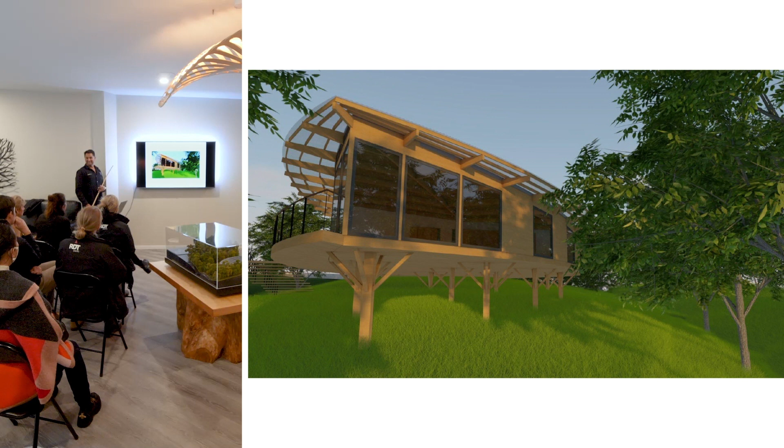Now, this is what it was meant to look like. It's pretty close. We've lost a few things along the way, but by and large, it's about there. The thing that this has is that the foundation piles are trying to mimic trees. So the roots come out from the ground, and then the building sprouts up. That was the idea. There's clear roof for light, photosynthesis, so the kids get enough sunlight and perform well.

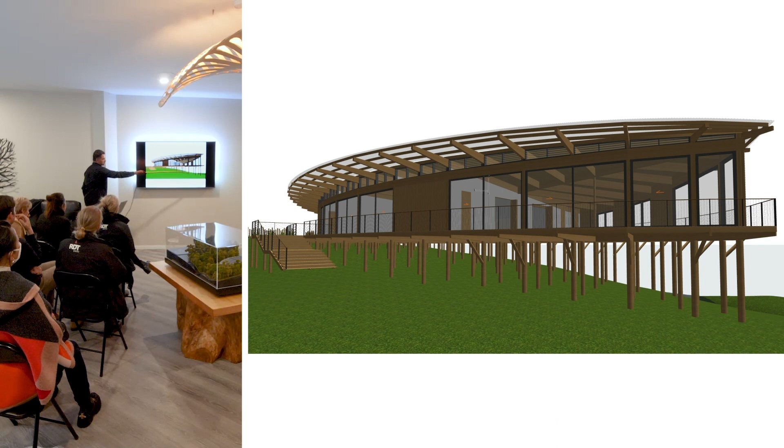So yeah, these are early concepts. You'll see the back of the building is quite tall piles. So at head height, you'll be within the treetops there. So a very interesting project, and it's meant to resemble a leaf. All of you have seen a leaf before. So as you walk through, you'll see what the design philosophy was, and that's almost like a leaf.

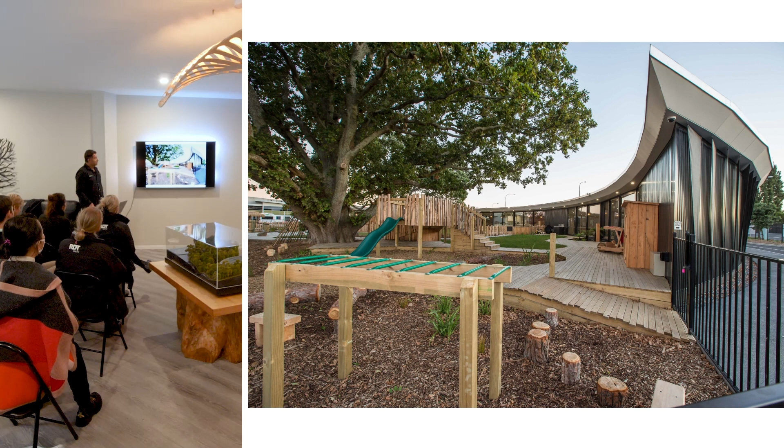Well, we're no stranger to building weird curved buildings, so this is one we did a few years ago, which is shaped like a crescent, quarter moon, wrapping around two trees, which the client also owns. Quite nice, sharp, pointy bits, which you can see there. And obviously we do a range of projects, small and large.

Now, some issues. As every project has issues, we all know. The issues in this one weren't too dissimilar to other projects, but some things were worse than others. The standard stuff: services, asbestos, ground conditions, procurement, transportation of materials, etc.

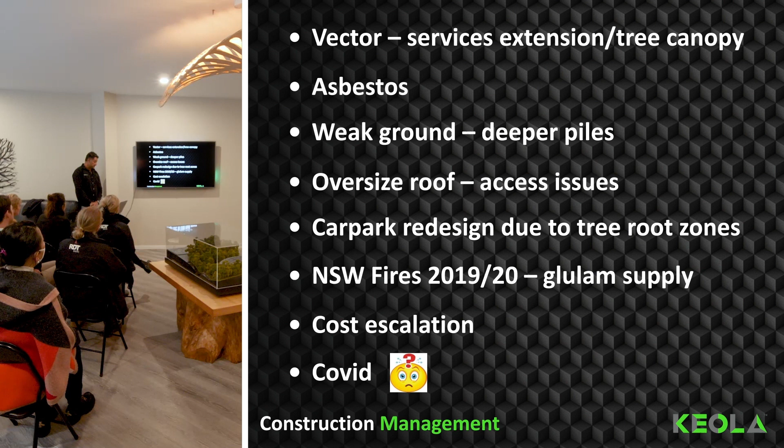Do you want to hit the light, mate? And a bit of redesign. Is that okay for everyone? Yeah. Maybe I can use my pointer now. Would be smart. No. Old school is better. Okay.

So I'll walk through a couple of the design elements. One of the key things was, as I showed you before, that it's meant to resemble trees and leaves. So we had external beams coming through the roof, which were meant to be the little veins of the tree, and obviously it needed to be in timber.

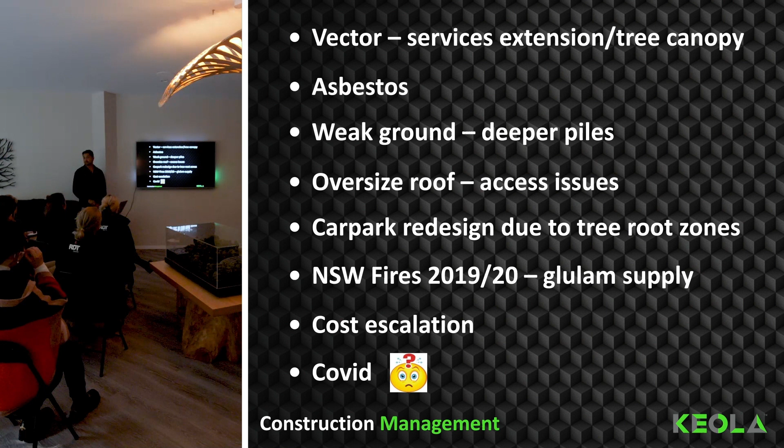But there were some fires just prior to us starting the project. So procurement-wise, these were all imported beams, which would have really thrown the project out, and there was a lot of uncertainty about timing and costs. And the standard cost escalation, which happens in pretty much 99% of jobs. And COVID, well, everyone's been blaming COVID for everything in the last 2 years. Everything's COVID. So we were a little bit the same.

How do you read that? Well, you read that as dollars, dollars, dollars. That's all it is at the end of the day, isn't it? And why is that a problem? Everyone's got money. What's the problem?

Well, the problem is that through COVID, most businesses experienced a huge business downturn. This school, obviously, kids were staying home, enrollments were low, etc. That affects your revenue. Holding costs, debt servicing, general uncertainty, people don't know what's going to happen. So we were asked to basically find some ways of saving money, which is easier said than done.

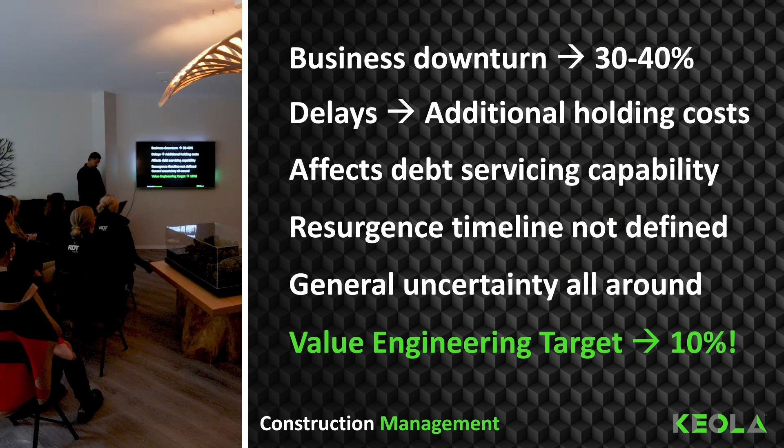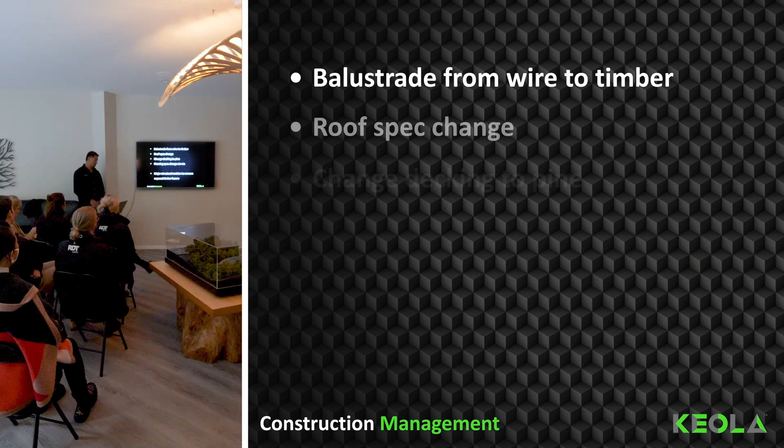So we came up with some solutions, lots of solutions, but obviously within reason. You still need a roof, you still need windows, so you can't go chopping everything out. So we had some general basic spec changes, changing balustrades, flooring specs, etc. But those weren't really adding up, so to speak, to what our target was.

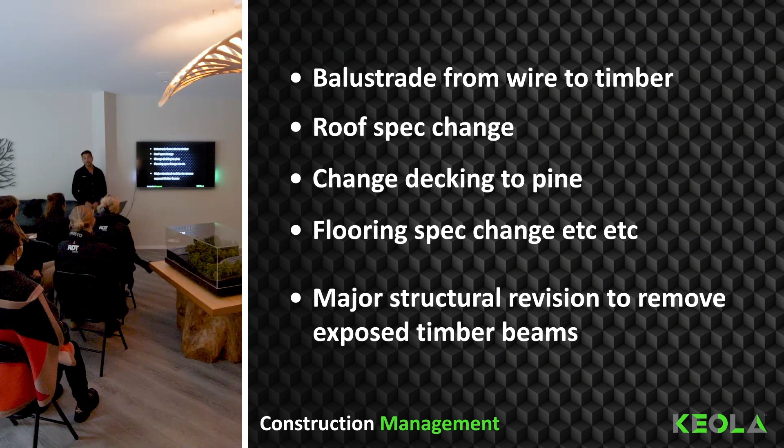Our target was 10%. The major thing was a structural revision to try and remove the exposed timber beams. It was expensive, it was coming from overseas, timelines weren't known, and without a roof, you can't progress much else on the building. So we decided to do something with that.

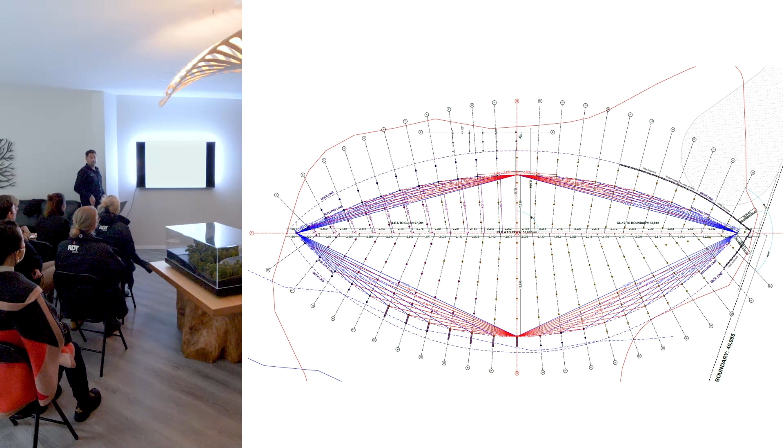So quick design summary. As you can see, it's a bit of a complex structure, quite a complex geometry with various lines and projections. All of these, you can see they flare out. They're not all parallel, which makes our life a bit interesting. Reminds you of the leaf. And the central core of the shape.

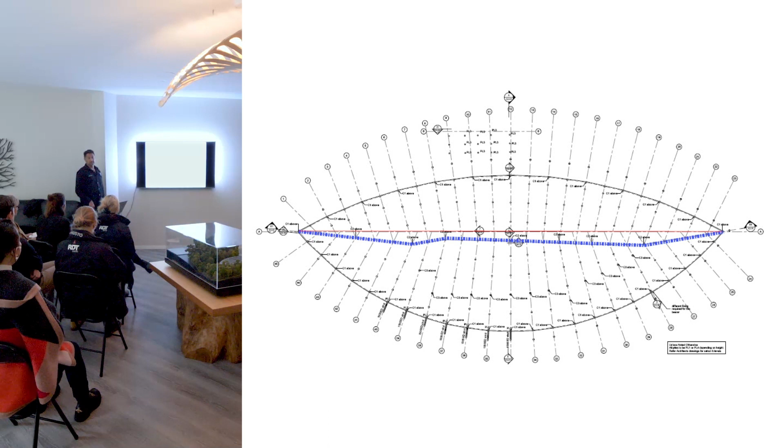So this here basically was where everything is connected to, and it could have been straight, but unfortunately wasn't. So that's fine. We carried on. Were we to complain? If you look at all those dimensions, no two dimensions are the same. Simon's shaking his head. Yep, he's been there, done that. And if you don't believe me, there's some dimensions you can look at.

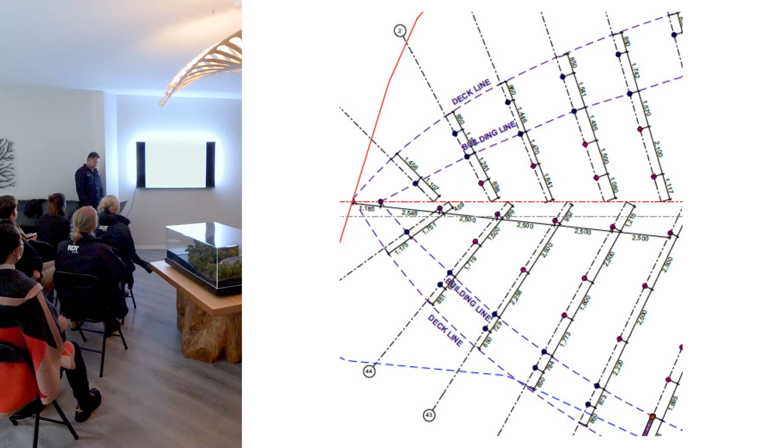Normally, it's not a big deal. You stick in the GPS, you go and mark it out. The problem here is that you don't get GPS signals. Despite all the technology, the trees that we're trying to protect are not allowing us to do our set out. With the GPS, you walk around and say, this point is here, this point is here. Here we couldn't do that. Now you go back to third world again and try and use theodolites and machines to figure out where each of these piles that you see are meant to go.

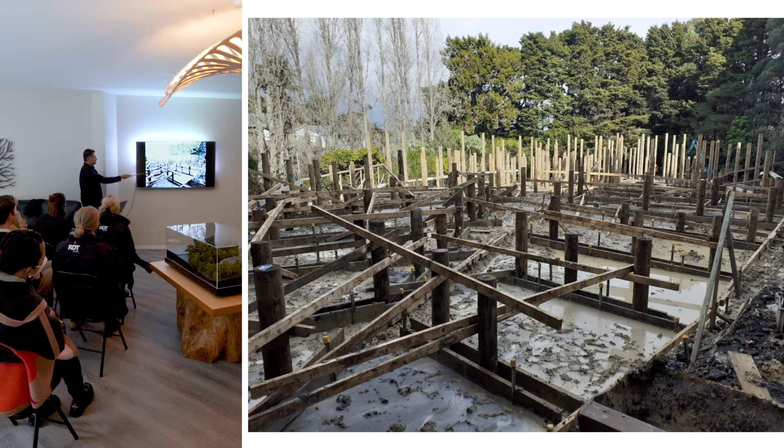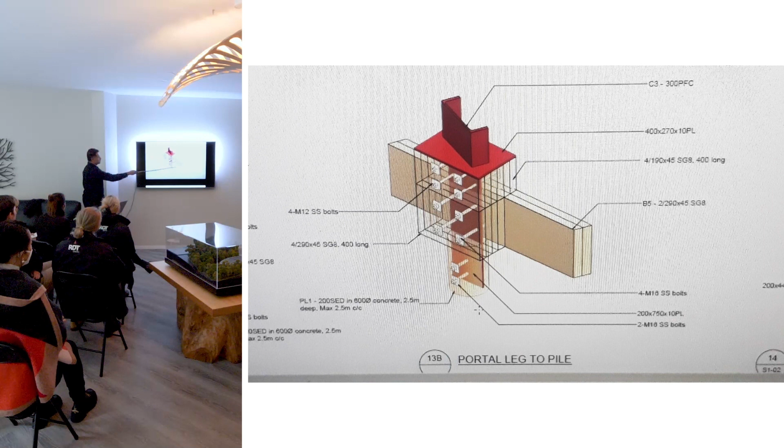Well, why are they important? They've been designed to serve a function, and the function is as follows. Non-technical people might want to just look away. So there's the steel columns coming down that transfer the load onto this member, and all the floor joists come down into the pile, which I'll show in the next picture. More technical stuff. So the steel comes down into here. There's a plate that's meant to go down into a timber pile. And so far, so good.

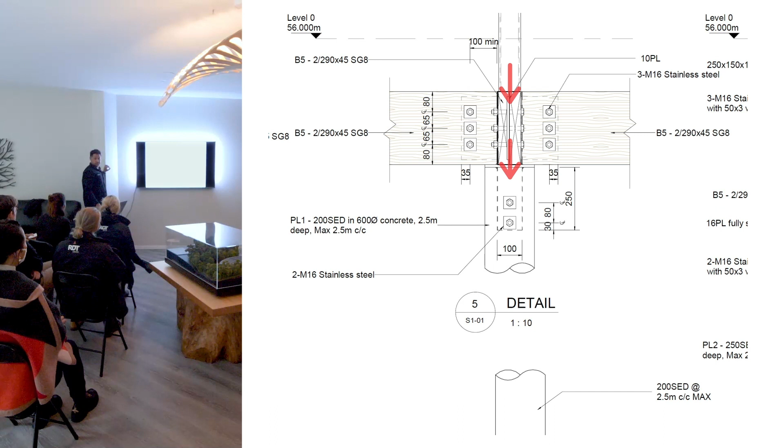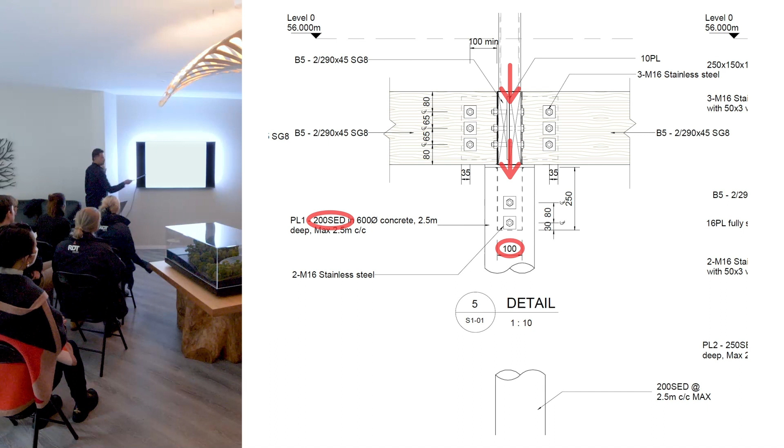The size of the pile is 200 SED. SED means small end diameter, so trees grow like this, so the piles are not completely vertical. They can be a little bit distorted. So this is 200. The inside part is 100. That leaves us 50 millimeters on either side to play with.

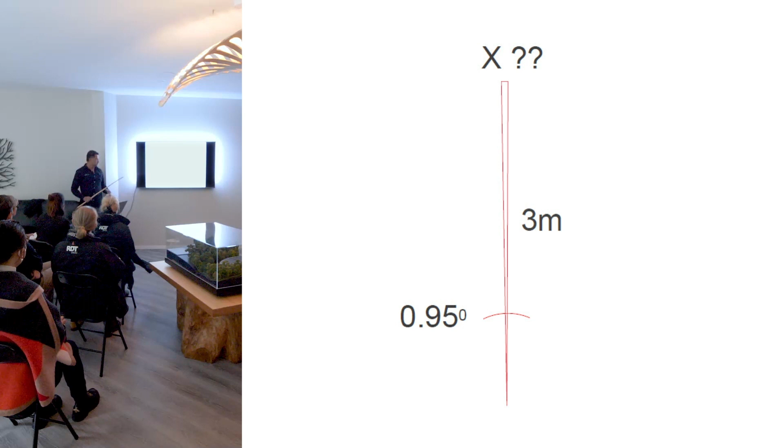Now, I've got a gift for this. The piles there are 3 meters. If you had a pile that's 3 meters long, we all used the protractors in high school where you measure the little degrees. So 0.95 of a degree of distortion here will give you an offset up the top. Who can guess what it is? There's a prize. The closest answer. Come on. 50. The first guy answers, because I reverse engineered the 50 millimeters. So there you go.

So 50 millimeters. Can you imagine? We've only got 50 mil tolerance. We move this thing by less than 1 degree, we already lost the 50 millimeters. Now, who's seen how a digger operates? Who's seen a digger drilling a hole 3 meters deep? It's a little bit difficult to achieve that 50 millimeters.

So anyway, we persevered. We put them all in. But we said, hey, look, there's no way to guarantee. These things are perched 3 meters up in the air. We'll do the best we can. And we put them all in.

And then we got a surveyor to go and do what we call an as-built in technical terms. So there's a pile. They would mark the center of every pile. I think there's 240-something odd piles. And they would extract that data so that we could overlay that back into our design and see where the discrepancies are, what's moved and needs to be adjusted, etc. So we had to do that.

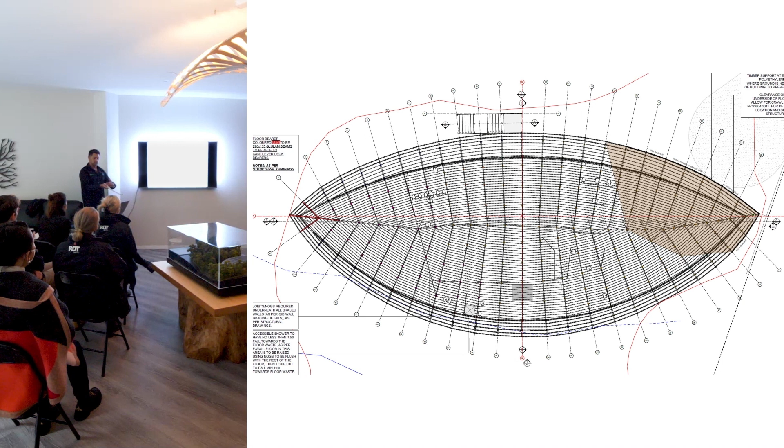Well, we don't complain. So as you can see here, the sections are basically 2 sections apart and then they turn. So this one will come in, the next one will come in, etc. And they all got to land on a pile somewhere, somehow, so the load gets transferred. Remember, the pile's already out by 50 mil, possibly.

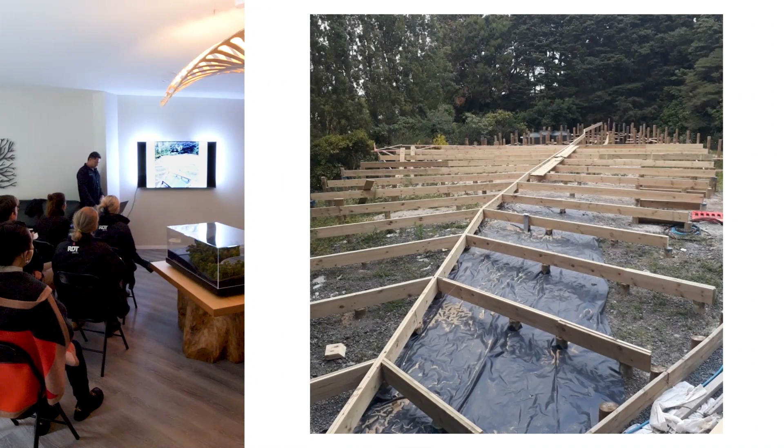So we carried on with putting all the floor structure in and the leaf started to take shape, which is quite nice, getting out of the ground. You can see the little vein offsets here. They're all kind of staggered.

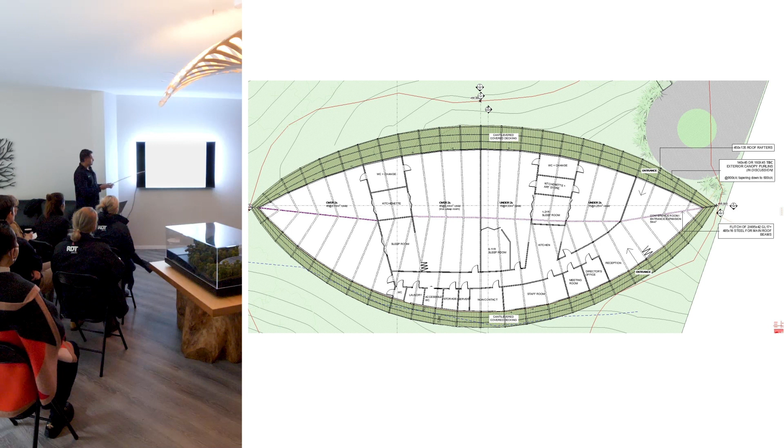And the internal floor plan was as follows. So again, nothing's really lined up to anything. So, you know, the best I can give you is this wall here is lining up with the other walls, really. And everything else is take it or leave it. So remind you of the leaf again.

So I thought, okay, well, look, we need some big cost-cutting measures. We can't be just changing the carpet and save money and all this kind of stuff. So I got out my red pen and a blue pen and said, okay, we need to straighten some things out. Why does it help? When things are straight, the symmetrical load transfers are easier, connection details are easier, spacings are easier, it can be calculated. So this was my go at it.

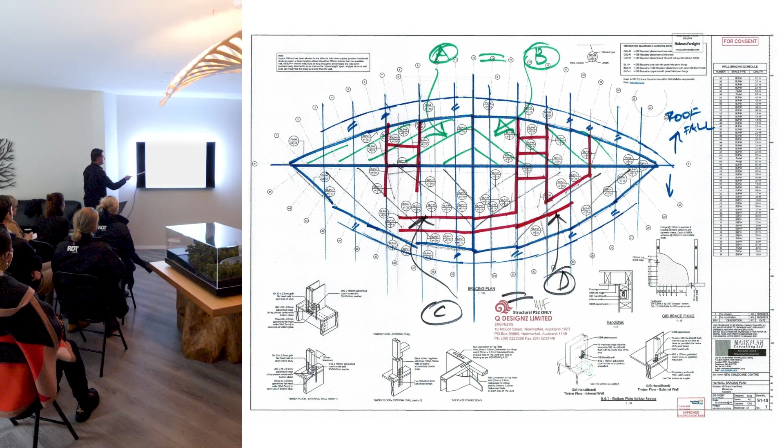So I tried to straighten up some of these things and make these sections longer so that at least one piece of timber can go across 3 piles rather than having to change direction every so often. And so I presented that to the client and he said, well, what does all that mean? I don't really know. Save me some money. I said, okay, well, I'm passing that on.

Then we passed it to the structural engineers, which were quite helpful, and tried to mimic what I had done as best as they could, because mine obviously wasn't a structural design, it was just a sketch and scribble. And we almost got there. A lot of things were straightened up.

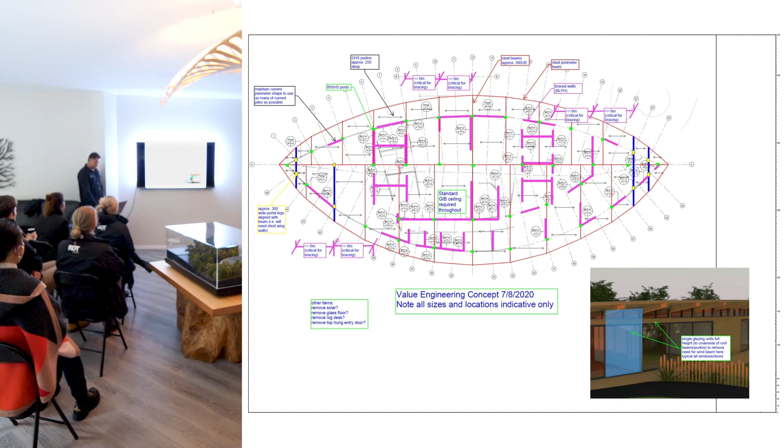And what that meant is the piles that we had already installed, which were 3 meters high in some places, now with the redesign, some of the piles were being missed. So we've optimized one thing, but we de-optimized something else. So the loading wasn't landing on piles. So what this is showing us is that we ended up then having to go in and put some additional piles so that we could now carry the loading from the top.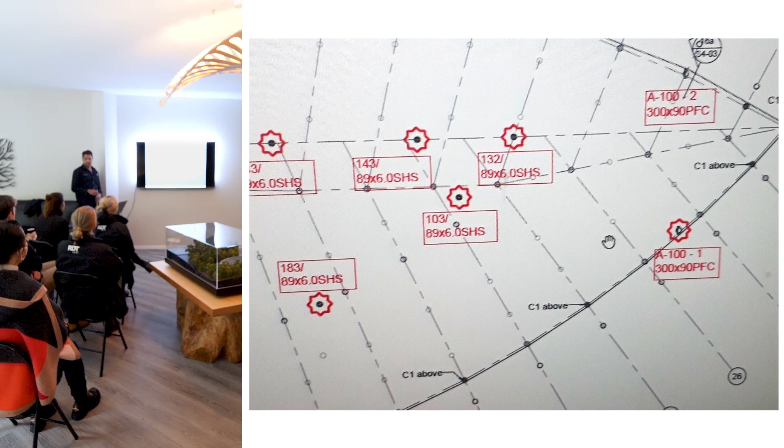So that wasn't too bad. And this is what it ended up like. This is basically where things would need to land, 3 meters up in the air. And some insulation and things.

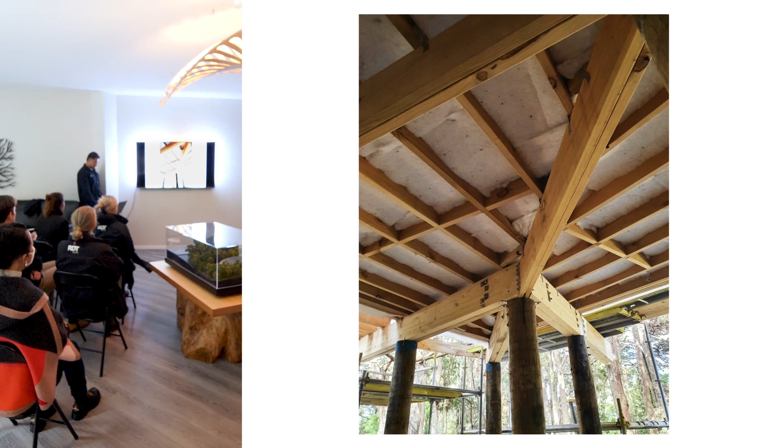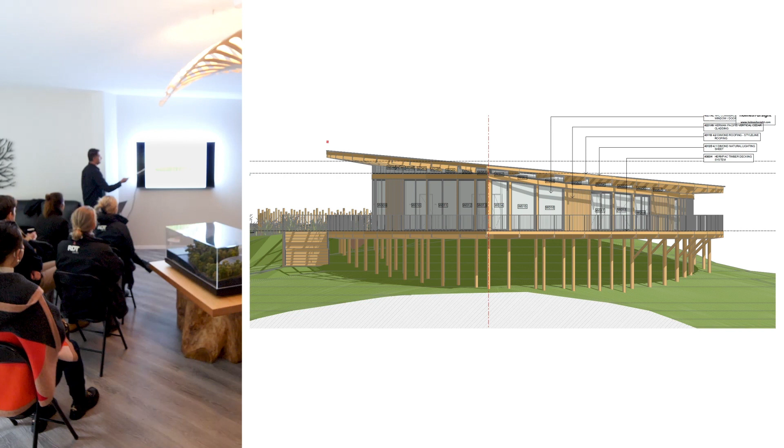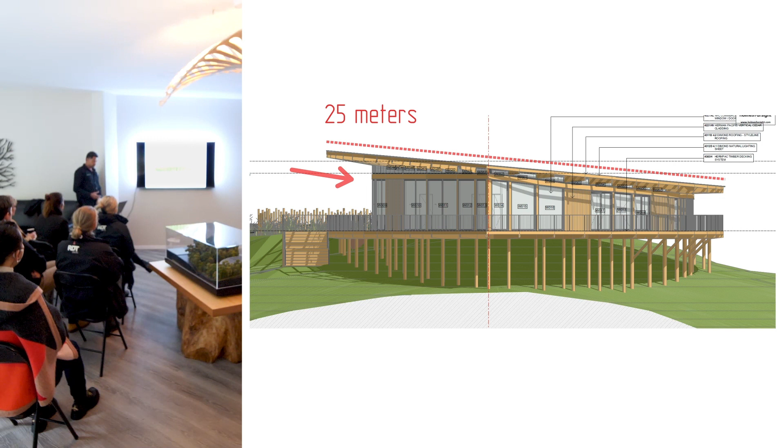So this was another kind of slight issue here, which is the roof is quite a long monopitch roof. I think the distance from there to there was about 25 meters. When there's a reverse slope on something, if there's any water, it will try and get into the building. How do you stop that? There was an issue. And I remember when we had the timber beams in the original design, it would have looked like that, and you would have all these basically continuous from the outside into the inside, like the leaf veins of a leaf. The slight problem with that is that the flashing obviously is whatever tries to prevent water.

The flashing detail was so complex that there had to be a flow chart for us how to do it. So we racked our brains trying to figure out, okay, well, it can be done, anything's possible, but the complexity of that, and remember, there's not only 2 beams. If there were 2 beams, we'd do it in a weekend, but there were, I don't know, 50 of them. So every beam, you'd have to follow a process to do this flashing so that the water doesn't track back into the building. So those add cost. Again, it can be done, but they will add cost.

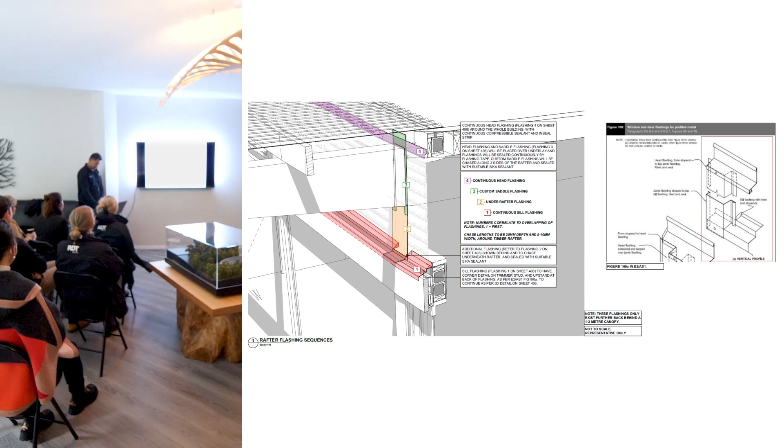So we said, okay, we're going to have to do something about these beams. You can't get them in from Australia. They're very expensive, no timeline. What's the answer? Get rid of them. So we did. And we went to a steel structure, nice and straight, easily available in New Zealand. Lose some of the effect, obviously. No trees have steel branches, but it served the purpose. And if you stand outside the building now and have a look at the early concept and look at this, it's close enough to the truth.

Right? So another problem that we encountered was with the roof being 25 meters long. This here at the widest point is 25 meters long. It was designed as a single run, so it would just be one sheet of iron, 25 meters long. No problem, it's easier, less joints, etc., safer, right? The problem with that is that's the main road.

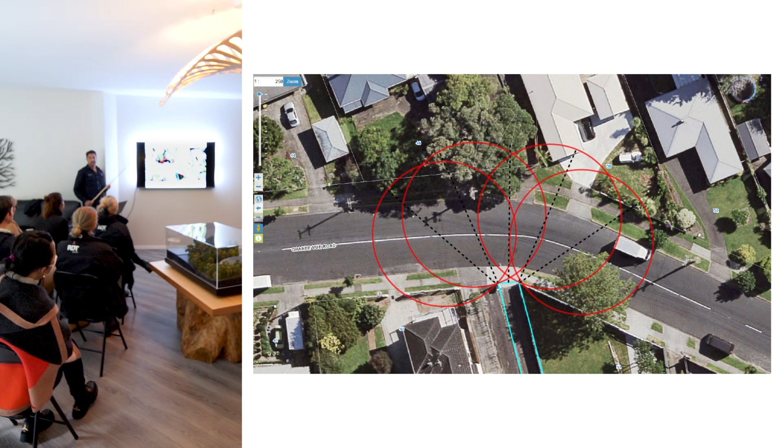All these black lines are 25 meters long, and that's without the cab that actually carries the trailer. So ignoring that, just the trailer, there's no way you're able to reverse a straight line 25 meters into the site. So the lesson here is if something goes into the design, you've got to think about how it's going to arrive on site.

So the client said, I wish he wasn't here, but he's here. The client said, I don't care. You guys quoted for the job. If you need to get a helicopter, get a helicopter and do it. Okay, yep. We started looking around for helicopters. The cost for flight time was $10,000 an hour.